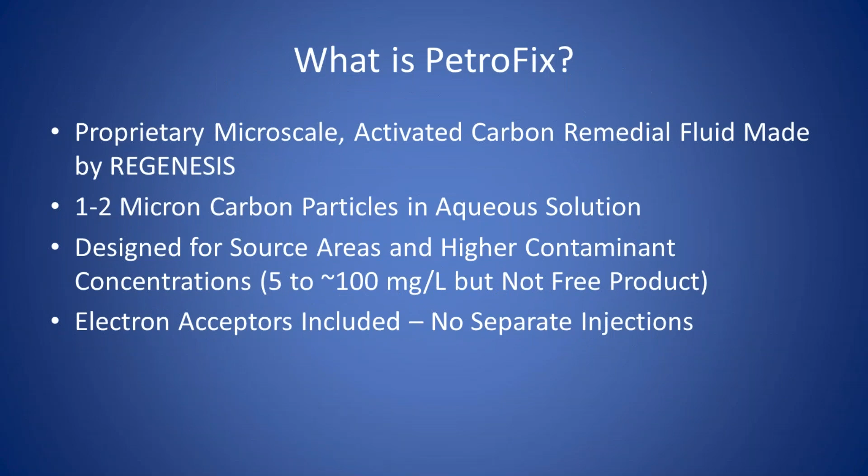It cannot do free product, but it really opens up a wide range of sites to remediation. And that's not to say that it won't do polishing steps too. It'll do basically 100 milligrams down, so a very wide range of applications. They have also included the electron acceptors to enhance biodegradation. As opposed to some other technologies, you don't have to do separate injections of oxygenates or electron acceptors, that kind of thing. And Chad's going to talk about that a little more in detail later.

Now, the pilot test site was the Reef Deli site in Panama City Beach, Florida. It was the first field use of PetroFix outside of the laboratory. It's an insurance site that we have, so it's a privately funded, performance-based cleanup site. There was approximately a 1,000-gallon discharge of gasoline in March of 2007.

Shortly after that, they did a source removal by excavation, and then a series of consultants and technologies worked on the site, and they've done groundwater treatment by pump and treat, by bioremediation, and by injection of hydrogen peroxide. None were ultimately successful. There were varying degrees of success, but there was still a fair amount of residual contamination out there. Of even more concern was there was off-site migration of toluene, ethylbenzene, and xylenes, naphthalenes, and total recoverable petroleum hydrocarbons.

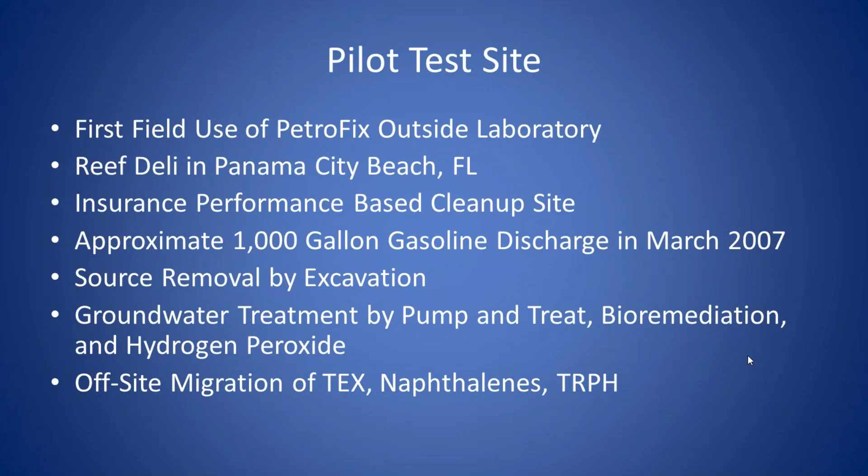The site layout: this is the Reef Deli site. It was a gas station, now a convenience store. You can see the dotted outline was where the tanks had been and what was excavated. And then the contamination went across Front Beach Road. This was a former hotel site that's been razed, and it actually went, there's a sea oats area here, and then all the way out onto Panama City Beach at one point in time.

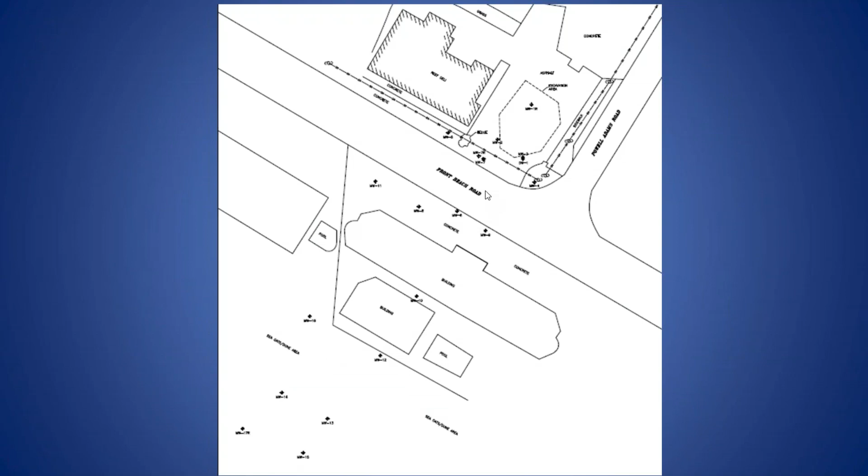There's a close-up of October 2017 concentrations of total xylenes. You can see in better detail the excavation area here. Note that excavation stopped because of this overhead power line. They couldn't get too close to that. Obviously, Front Beach Road is a pretty heavily traveled road, and they could not excavate or do anything out in the roadway itself. So residual contamination, as would be expected, on the south side of the excavation area, a lot of mass underneath Front Beach Road where we really couldn't access it.

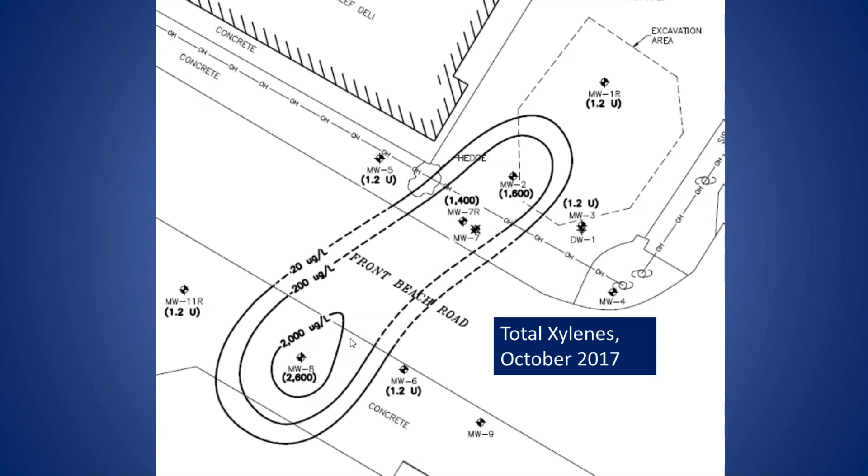And the highest concentrations in any monitor well were actually in this off-site well, monitor well 8. So lots of concern about how we were going to address this. And here's an aerial photograph view. The red showing the same concentration outline with the Reef Deli site up here, and this was the former hotel site with the sea oats area and the beach itself.

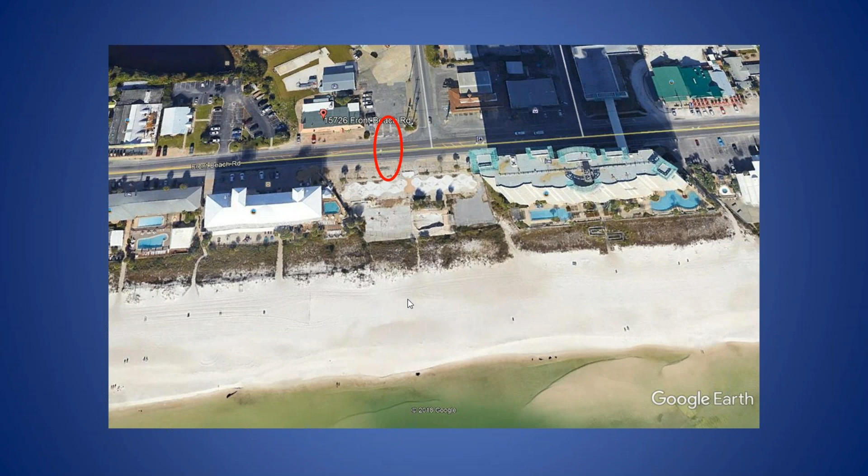So not awful working conditions. For some reason, I don't have any real problem in getting volunteers to come work on the site. And REGENESIS actually had some guys come from California out here for some reason. I don't know. But you've got to worry about the sun and the sand and that kind of stuff getting in all your equipment.

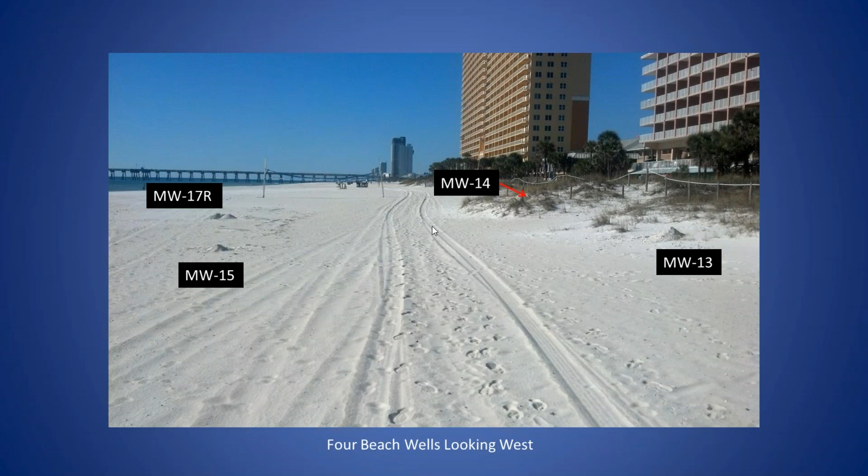Historically, concentrations have been up and down. I'm sure the guys that had the site in 2015 thought they were closing in on cleanup, but this is from 2013, so 6 years after the initial release. You had 40,000 total contaminants. It dropped down and then bounced back up and then bounced back down. But you can see when we were looking at it in 2017, it was still around 20 ppm, 20,000 micrograms per liter of total contaminants. Benzene was gone, which is good news, but toluene, ethylbenzene, xylenes, naphthalene, and total recoverable petroleum hydrocarbons were all of concern. The groundwater cleanup target levels that we're being held to are shown there also in micrograms per liter.

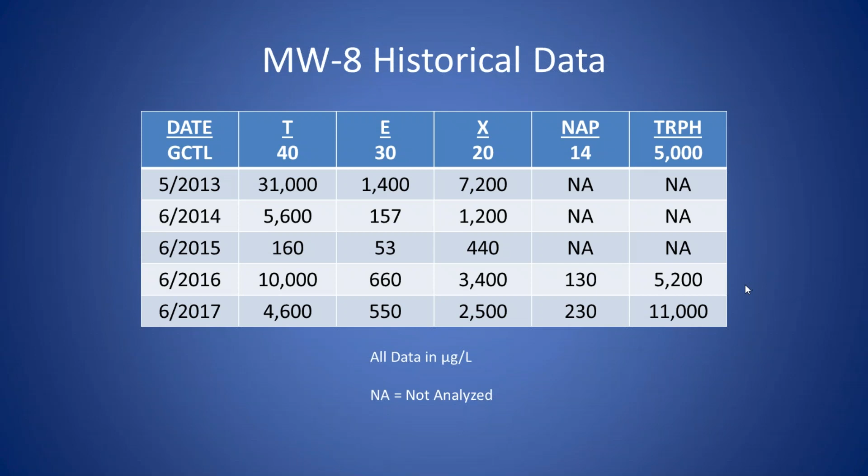Well, we put together a pilot test plan in consultation with REGENESIS. We focused on monitor well 8 as the off-site well, which obviously was a concern. We'd like to bring everything back to the site, and also the hottest well. The plan called for 1,700 pounds of PetroFix, including 40 pounds of electron acceptor salts, in an aqueous dilution. This, as I said, was the first field application. So they're taking it out of the lab into the field. And one of the things they were looking at is what dilution could be injected the most effectively. So they were playing with dilution rates.

They did a lot of pre-injection and post-injection borings to look at the lithology and the distribution of the PetroFix after it was injected. But the plan called for injection from 10 feet below land surface to 20 feet below land surface, with the groundwater table at about 10.5 to 11 feet, so just slightly above the water table to basically 10 feet below it, on 7-foot centers.

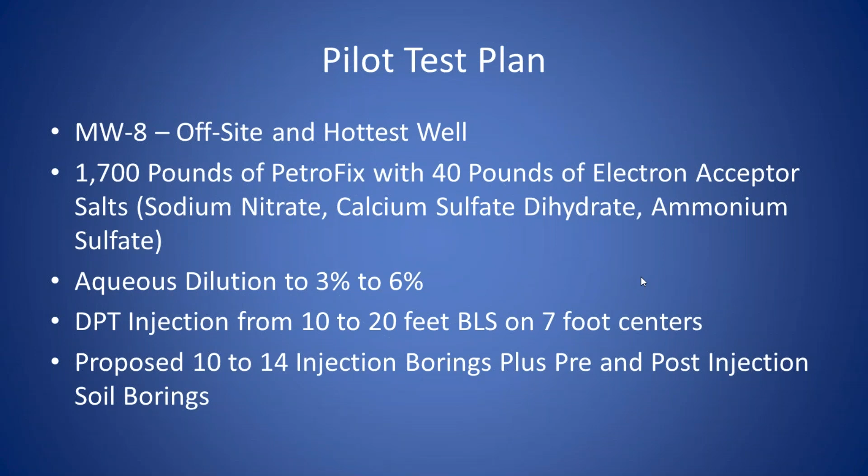We used, as I said, PlumeStop is sort of a sister technology to this. DEP requires an innovative technology acceptance letter, which is a letter that says, we've looked at the technology, we don't think it's going to cause any problems, and here are the underground injection control parameters you need to monitor for during the test. So we used that, worked with the district office over there in Pensacola, who were tremendously helpful, and got our plan approved.

As I said, the cleanup goals are the groundwater cleanup target levels in Chapter 62-777 of Florida Administrative Code. For those of you that aren't in Florida, that'll make perfect sense to those of us that are based in Florida. To those of you that aren't, as opposed to doing a risk assessment site-specific, what Florida did was come at it from the other direction and had a group of risk assessment and toxicological professionals come up with a

table of cleanup standards. The groundwater cleanup standards are basically the federal maximum contaminant levels, the MCLs, the primary drinking water standards, and then they set standards for a number of other compounds based on that level of health risk. And this went through a full rule development workshop, public noticing, acceptance, and all that. This wasn't just something thrown out there by DEP, but it gives you a tabularized list for several hundred compounds that you can simply look up the cleanup standards.

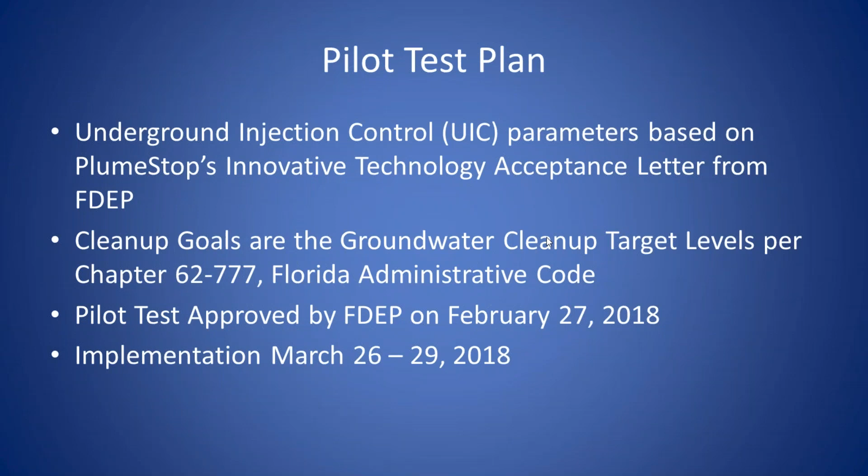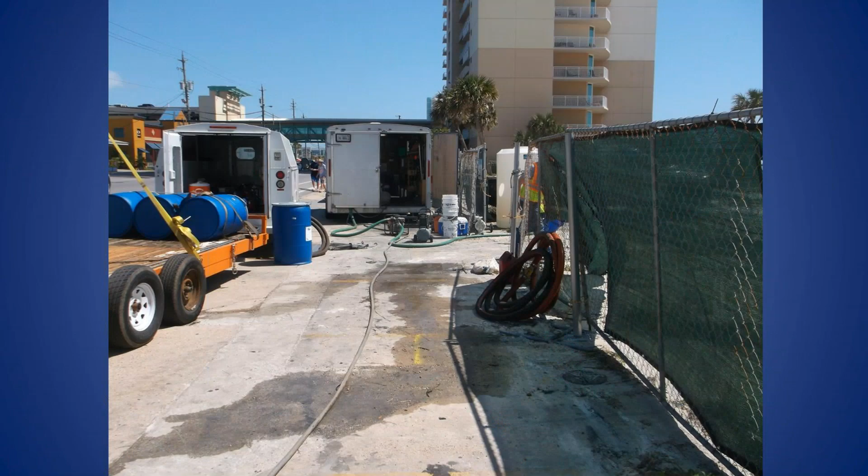The pilot test was approved by DEP at the end of February 2018, and we implemented it almost exactly a month later in March of 2018. As I said, we didn't have water on site, so we were ferrying water over to this poly tank here. And then we had the PetroFix on the back of the drilling truck there. This is REGENESIS's mixing trailer. So they've got mixing tanks in there.

We would take the PetroFix, they were bringing it in 5-gallon buckets. You can see that black. It's a very, very black, if you've ever seen granular activated carbon, same stuff that you use in aquarium filters and that kind of stuff. It's pitch black, and this is a pitch black liquid. They were putting it in there.

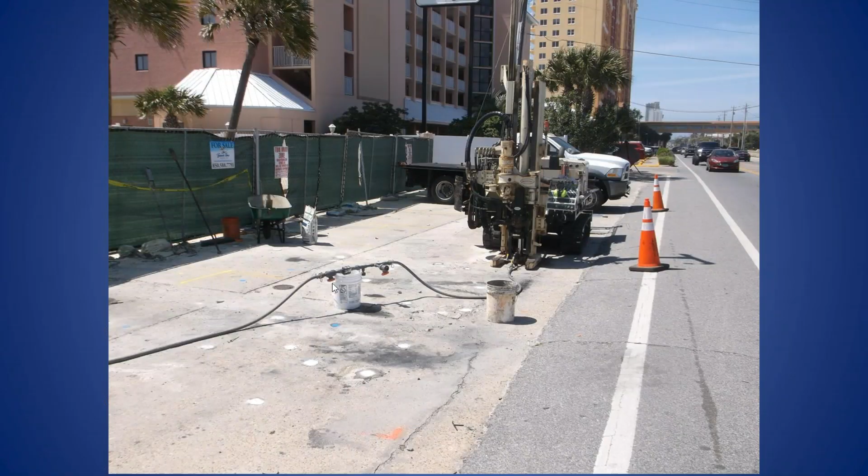They have a bunch of pumps and metering devices in there, and then it was coming out with this hose, going through some more meters and pressure gauges out here, and then getting injected through a direct push technology drill rig. That's monitor well 8 that we saw previously. You can see each one of these little white dots was a DPT injection point or boring.

That's not to say that every one of these we had PetroFix injected in. Like I said, a lot of what we were doing was going slow and taking pre-injection lithology borings, and then post-injection looking at how the PetroFix had distributed in the subsurface and comparing that to the various dilutions.

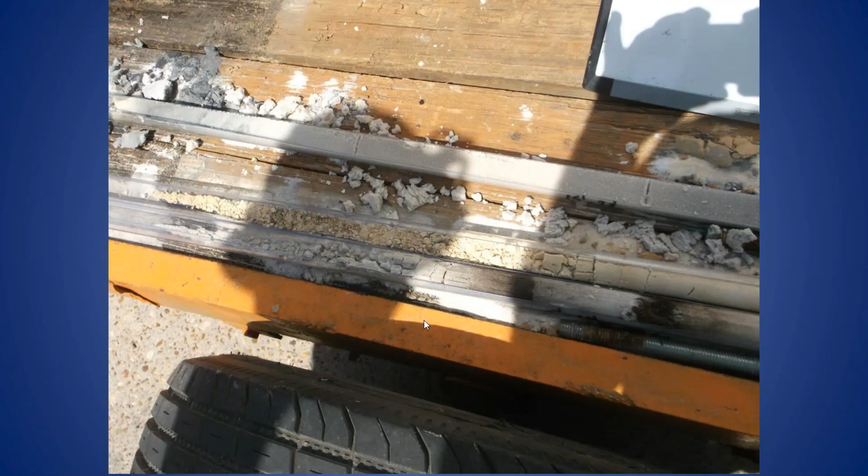Here's one of those cores. One of the reasons that REGENESIS was interested in this site was this is probably as close to a laboratory sand tank as you're going to find in nature. This is all beach sand. It's a very fine-grained sand. You can see, white, and then it gets into some staining from the petroleum. But that's what we were injecting in.

So injections were relatively low pressure. Generally, most of them were less than 30 psi, and we were getting pretty high flow rates. I think we got upwards of 10 gallons a minute in a couple of those holes. So, yeah, ideal injection scenario.

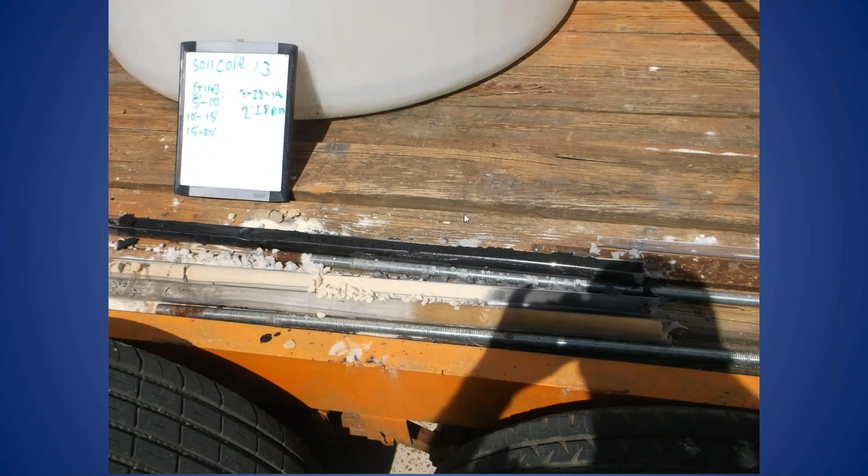And that's one of the nice things about PetroFix is you get a real visual indication of what's going on. There's no special equipment required to begin to see whether you got distribution or not. If it's pitch black, you got it out there.

Now, PetroFix works through a two-part mechanism. The first is obviously just direct adsorption onto the carbon, similar to any granular activated carbon vessel. Exactly same mechanism. Once it's in the environment and has plated out on the soil particles, it also provides a really ideal substrate for biological degradation. And as the degradation continues, the bacteria eat the contaminants, they basically free up a sorption site. And then another molecule of contaminant can get attached to the carbon, and then the bugs can eat that. And it's a repetitive, almost in situ renewal type process.

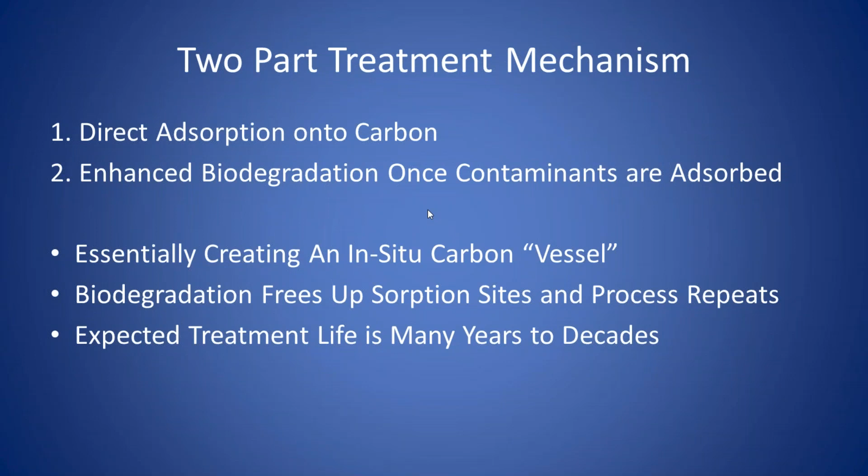So did it work? I think the answer is pretty conclusively yes. You saw some of this data earlier. This is 2016 and 2017. You're in the thousands here. We injected in March, the end of March. So May was the 60-day post-injection test. The U means it's undetected at that particular method detection limit. Everything's undetected at 90 days or 1/4 post-injection, undetected. 180 days, undetected. We've got a couple of little blips that showed up actually below the reporting limit, but in essence, for a solid year since we've done the injection, everything is BDL. Not just below the cleanup target levels, but below laboratory detection limits.

I've not seen anything like that in 37 years. And I was around for when air sparging and soil vapor extraction were the newest, greatest things. I think it's in line with that as far as a disruptive technology. Now, obviously, it needs to get proved in the field, and we're working on that. But that's just incredible. Really happy with those results.

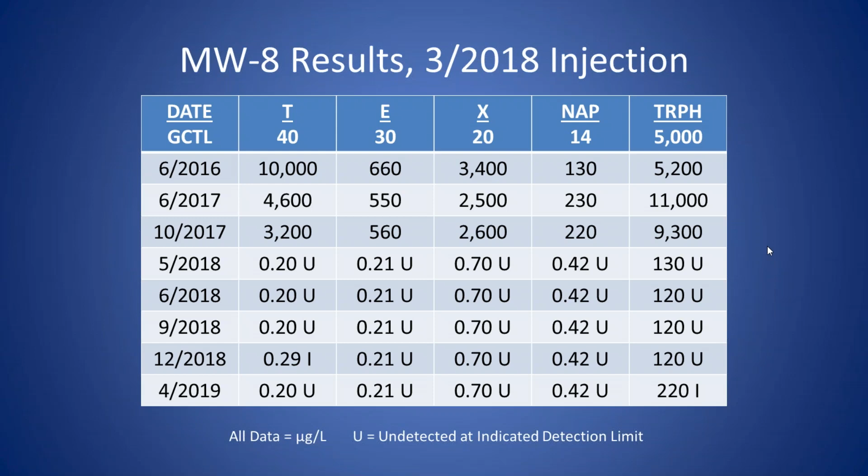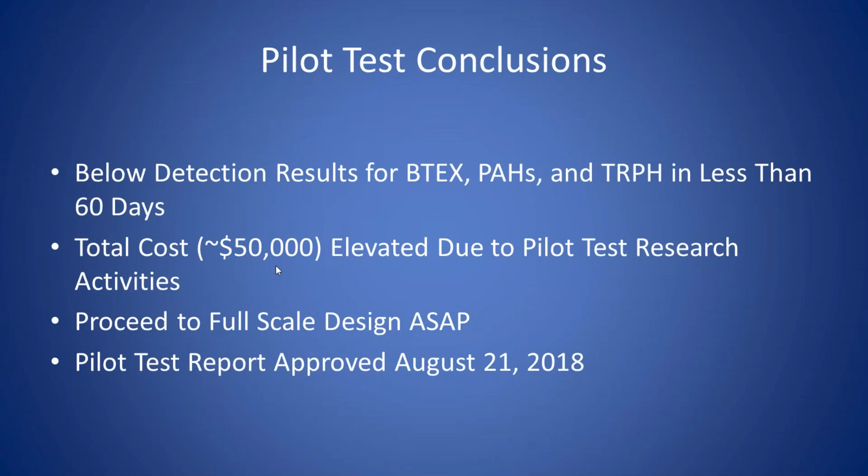So our conclusions were, we got below detection in 60 days. It stayed there for a year. We didn't know that at the time, but it has. The total cost for that pilot test was about $50,000. Now that was elevated, as I said, due to the multiple borings we did and the extra days we spent on site. But even that is not an enormous amount of money compared to what we normally spend on remediation. The obvious conclusion was, let's get the full-scale design as soon as we can, and DEP agreed and approved the pilot test in August of 2018. So we proceeded to the full-scale design, submitted the remedial action plan in early October 2018.

Now, as an engineer, one of the really interesting and attractive things to me, in addition to the performance, is the fact that there's a self-design internet application, petrofix.com. You go in, you enter in your site characteristics. It gives you a recommended spacing and dosage along with pricing. So you can do that all online at your desk. Now, obviously, Todd and the REGENESIS team are available to help you if you've got questions or just want to go over it with them. But compared to every other technology out there where it's all proprietary and you're relying on somebody else to do it, that's a huge benefit to me.

The area that's left on the Reef Deli site itself, so north of Front Beach Road, is about 1,600 square feet and is 2 wells, Monitor Well 2 and Monitor Well 7R. Water table there is around 13 feet, so our zone of influence that we wanted vertically was 13 to 23 feet. The application called for 2,800 pounds of PetroFix in almost 12,000 gallons of water and 44 injection points, which was a 6-foot grid pattern. Estimated cost for PetroFix and DPT injections was $35,000.

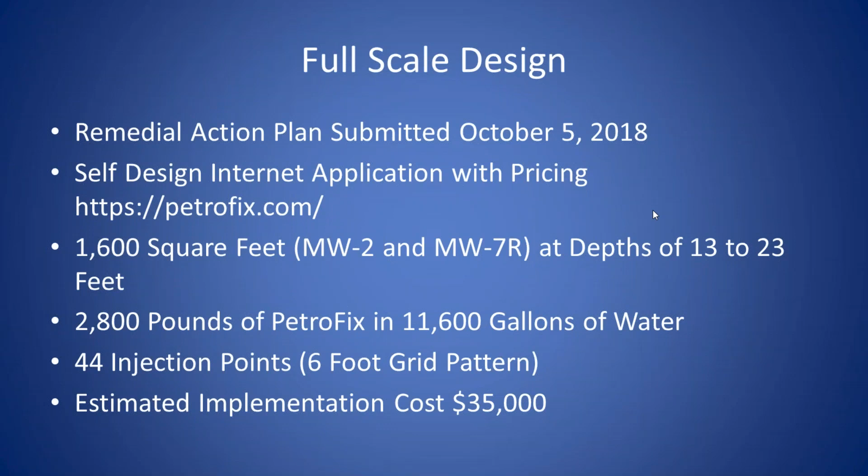Now, this was the plume in June of 2018, which is what we were using to base the design on. Monitor Well 8 had cleaned up. So we were left with the outer ring, which is the groundwater cleanup target levels, or the MCLs in primary drinking water contour. The inner is the natural attenuation default concentrations. And those are your 2 wells, Monitor Well 2 and Monitor Well 7R. We had good up gradient control with the clean well, good side gradient control with the clean well, and Monitor Well 3 had been clean for some years at the time it was abandoned. So we're pretty confident that the groundwater plume is on the southern side of this site and obviously extends underneath Front Beach Road. But because of the pilot test work we did around Monitor Well 8, not only is Monitor Well 8 clean, but essentially we've got a permeable reactive barrier here addressing that mass that is coming out under Front Beach Road.

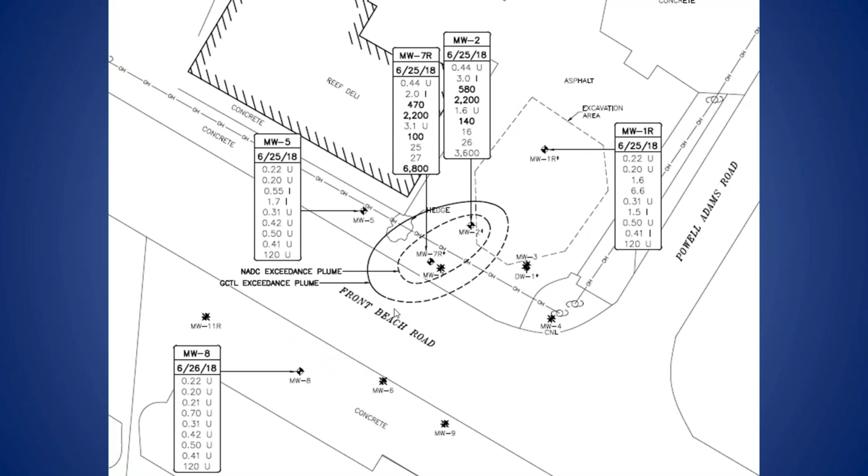And there was the grid pattern. We just tweaked it a little bit to work around some of the site features, and obviously we're going to push it as close to the road as DOT will allow us, but we're not allowed into the road.

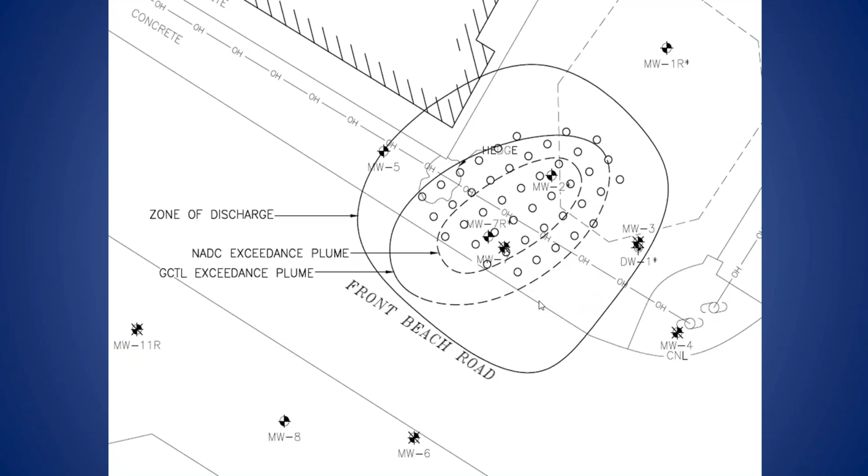So, are we going to talk about the full-scale successful implementation of this? Well, in the immortal words of Lee Corso, not so fast, my friend. Not so fast. We had a couple of hiccups in terms of some regulatory hoops we had to jump through. Just like the pilot test, we were going in under PlumeStop's Innovative Technology Acceptance Letter, because again, they're sister technologies, and I reasoned that if it'll work for PlumeStop, it ought to work for PetroFix. DEP disagreed with that interpretation.

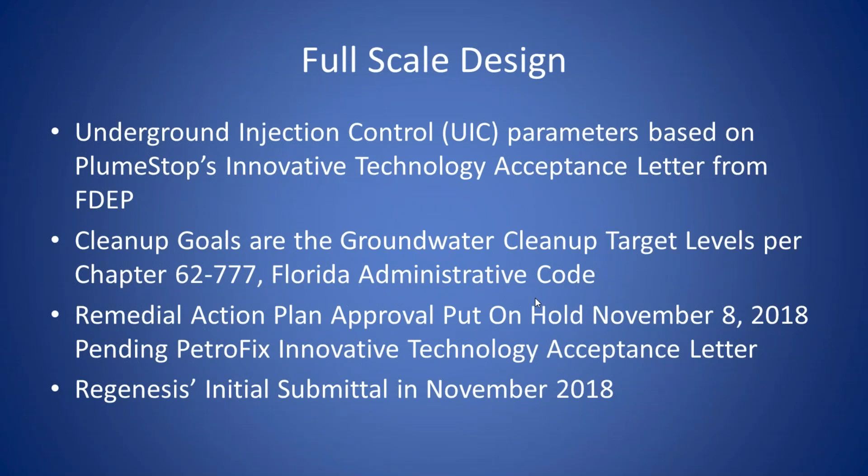They reviewed the initial submittal, came back in early November and said, hey, looks great, but you have to have an Innovative Technology Acceptance Letter specifically for PetroFix before we'll approve this. It got really complicated because the guy that had done it for the previous 10 years or so had retired that summer. So REGENESIS had verbal contact with the new person starting in early fall. They did their initial submittal in November of 2018. Lots of back and forth and discussions. And we got to an approval in May, which we thought was really good results.

Now, because the UIC parameters changed slightly, we had to do an addendum to the original full-scale design that we had submitted. We got that in a couple of weeks after getting that acceptance letter. And they came back about a month later and said, hey, great, you're all approved, except because the zone of discharge extends off-site, rules require that you notify all the off-site property owners via certified letter and public comment period. So that's been done. We expect everything to be wrapped up and approved by the end of this month.

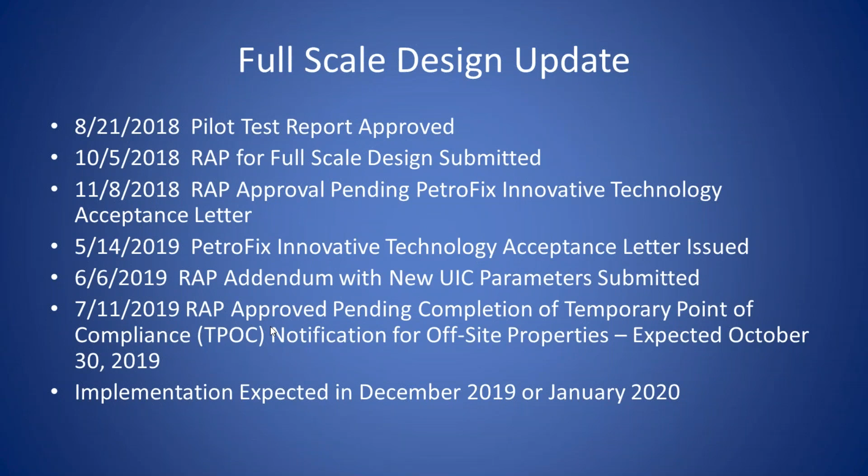And that will then allow us, once I can get the driller schedule, to actually go to full scale in December or possibly January. So we're there. I'm a little frustrated that we haven't gotten this site already done and closed out, but so far so good. The results are tremendous. So that wraps up. I think we're going to hold all questions till the end.

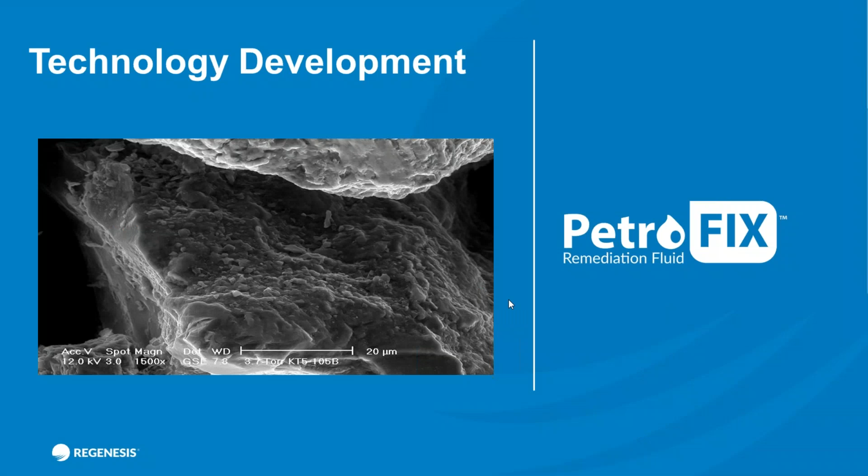So I want to take a look at how we developed this technology and where it started. As Gordon alluded to, this stemmed from the development of PlumeStop, which launched in 2013 after many years of R&D work. It's been applied at over 500 sites worldwide, and has been recognized as a leading in situ technology for the treatment of chlorinated solvents, hydrocarbons, and now passive plume management and treatment of per- and polyfluoroalkyl substances, or PFAS. You can see that natural evolution. We wanted to improve upon that.

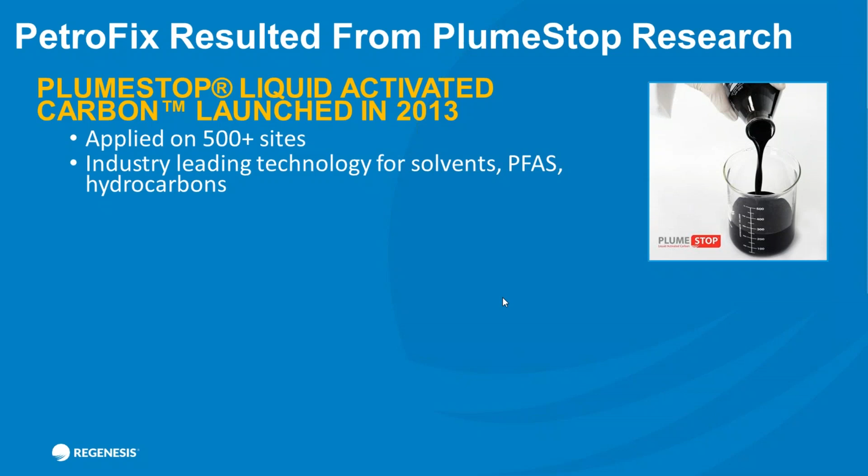And we looked at PlumeStop and said, well, how can we make this better for petroleum hydrocarbon cleanup? And essentially, there were several areas that we focused on. First of all, we wanted to look at higher mass sites. With PlumeStop, there were some limitations in terms of mass concentrations that we could handle. And so we wanted to improve in that area.

Gordon and I have worked on a previous site where we actually did a mass reduction step first and did that with chemical oxidation so that we could transition to PlumeStop. In the case of PetroFix, we can often eliminate that first step, that extra phase, so to speak, and move directly into PetroFix remediation.

So the other thing is we often would co-inject an electron acceptor with PlumeStop. In the case of PetroFix, it's already built in. We can mix it above ground. Part of it's built into the formulation. I'll show that to you later. And we can move right into injecting all that as a single material rather than co-injecting electron acceptors.

And also, as Gordon alluded to, we have turned this into a take control sort of process. So as an engineer, Gordon alluded to the fact that he likes to be able to have the design in hand, be able to work through the numbers, but not just the design, but also the application of this material. So from start to finish, the user's able to move through the design and application process.

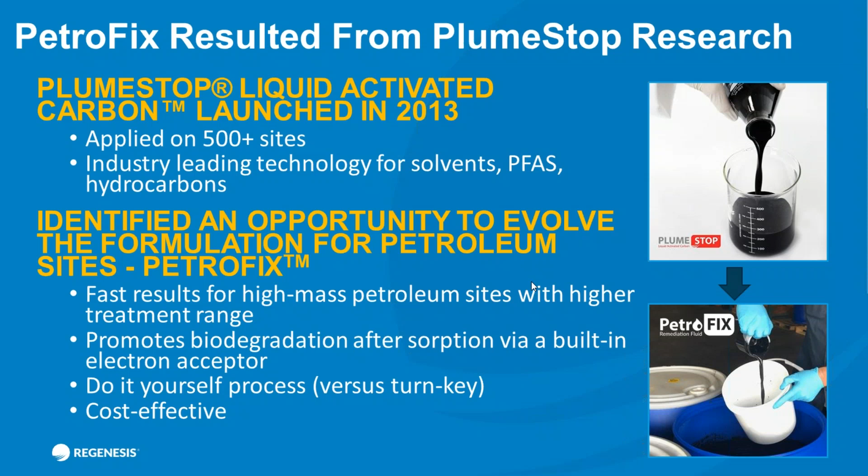So I want to take a look at activated carbon just in general and kind of compare that to colloidal carbon. So we're all familiar with granular activated carbon, or GAC. That's on the scale of about 400 to 1,000 microns. That might sound small, but it's really not, and I'll show you why. And of course, if you're going to apply this in the subsurface, you would need tremendous pressure. You're going to cause fracturing or fracking of the subsurface.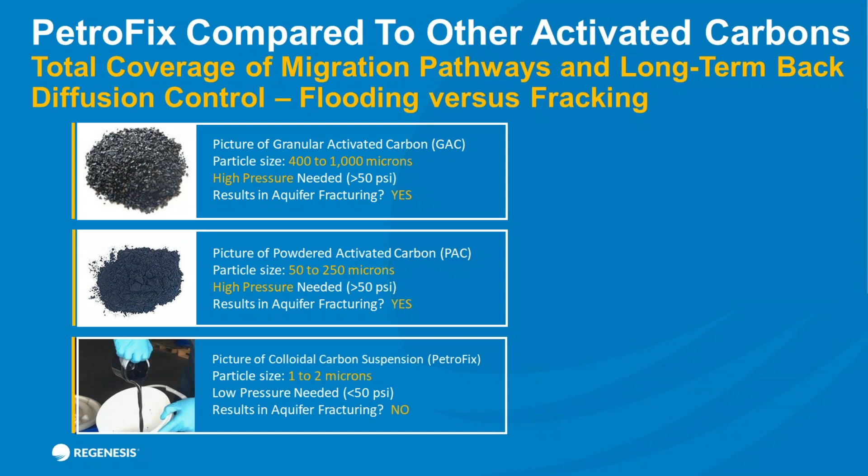And it's a similar situation even if you go to a powdered activated carbon. Although it's 50 to 250 microns, you're still going to need high pressure. You're going to get kind of a random distribution of that material and cause fracturing in the subsurface. However, with colloidal carbon, it's 1 to 2 microns. And so what you're able to do is actually move that material through the pore throat diameters of a typical geology and not result in this fracking.

We can inject at pressures generally less than 50 psi. On the Reef Deli site, we're able to inject at about 30 or so or less. And then that's obviously not going to result in a fracking scenario. We actually prefer flooding to fracking is one way to think about it.

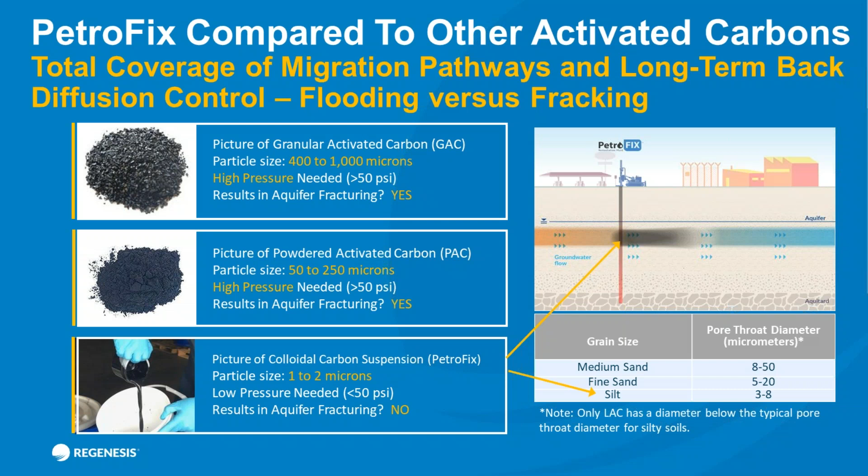So we're trying to distribute this material across what we would call the flux transport zone. So this is where the contaminant is moving. It dictates the architecture and the plume behavior. And so that's what we're trying to get to, that target treatment zone, and try to distribute across that entire zone rather than fracking this material under high pressure.

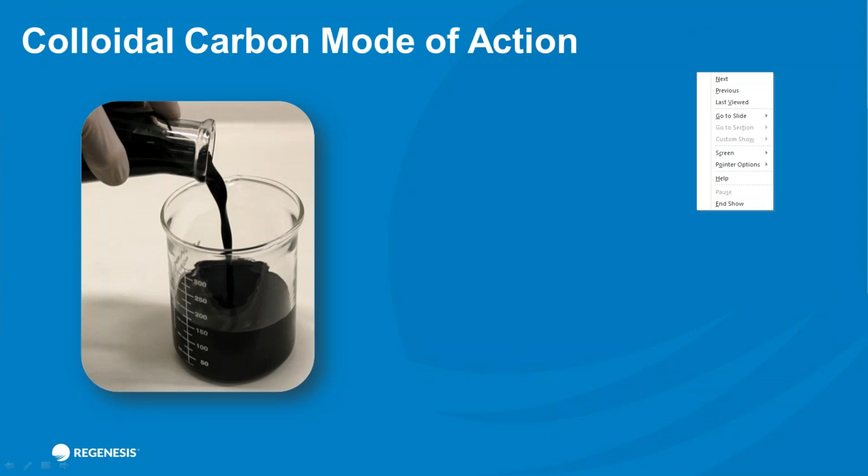So in terms of the modes of action, I'm going to give you a visual here. So Gordon had alluded to this. I want to do it visually. So the first step here is you can see that there's injection of material. It's going to create kind of a light coating. It's going to become a part of the aquifer matrix. I like to say it actually paints the remedial landscape.

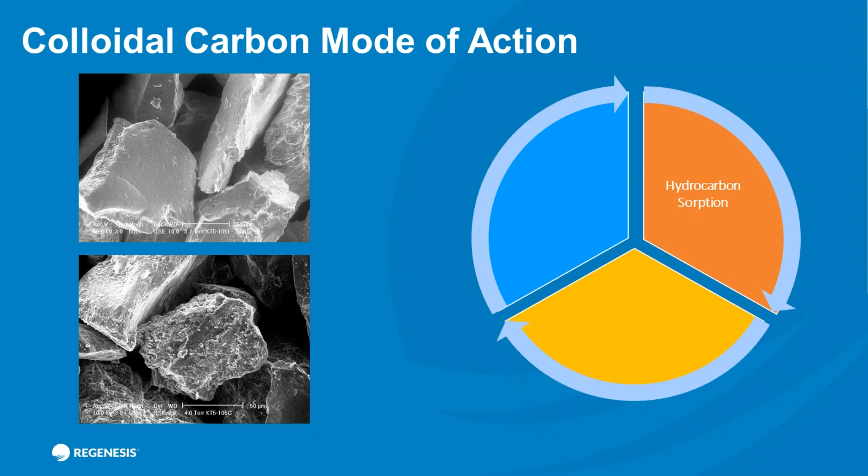So we're converting the subsurface into a carbon filter essentially. And we're not blocking the pore throats. We're not changing the hydraulics of the system. We're creating a carbon filter in situ. And then after that happens, you can see that the microbial community now moves in. They start to build some of their microbial condos, and they're going to occupy essentially this large surface area that's provided by the activated carbon.

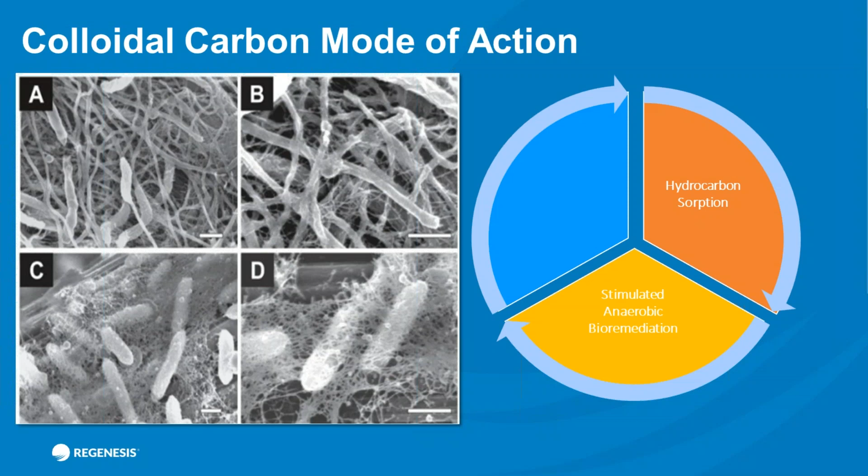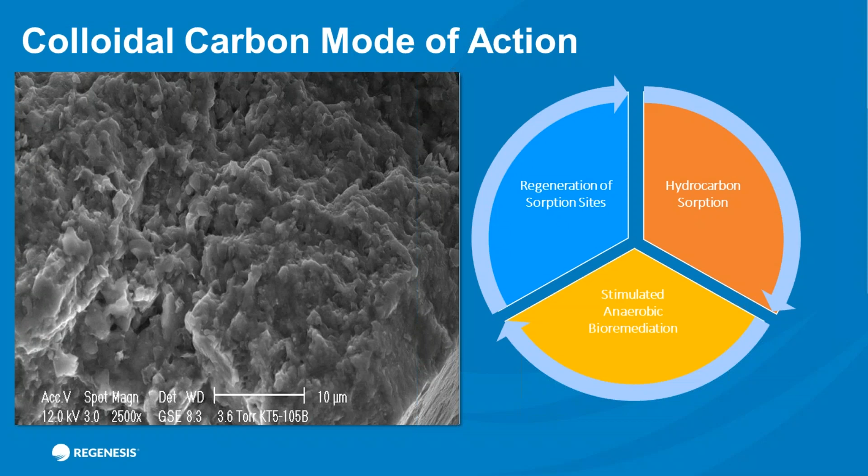And once that starts happening, you'll see that they start to degrade and munch on these molecules and essentially free up new sorption sites by naturally in situ regenerating that carbon surface. So as long as these microbes are receiving what they need, they reach a state of what I would call biological or biogeochemical bliss is what I like to refer to it as.

So that's the general process. That's going to apply both to PetroFix or PlumeStop. It's colloidal in nature, and they both behave in the subsurface that way. But let's look at a couple of the differences between these two colloidal carbons. So first of all, one major aspect or difference is the amount of carbon in the reagent itself.

So PlumeStop is around 4% or more as shipped, whereas PetroFix is going to be in the 7 to 8 times more carbon content range, over 30% generally. So you're getting a lot more carbon and a lot more sorption capacity built into that. So that's one of the reasons that we're able to use it for higher mass sites.

Now, PlumeStop has a very unique dispersion chemistry. It has a natural organic polymer built into it. It's what allows it to distribute, but not indefinitely. And then that polymer essentially degrades and it bonds to the aquifer matrix.

PetroFix doesn't have that same chemistry. And you can think of it as kind of the price to pay a little bit for adding in the extra carbon. So you're going to have to do a little tighter spacing, generally maybe in the 5 to 6.5 foot range on center. So that's another difference between the two reagents.

PlumeStop generally is used as a platform, and then we're co-injecting different reagents with it to determine how we want to handle the particular contaminants of concern. Whereas PetroFix was really formulated specifically to deal with petroleum hydrocarbons with that built-in electron acceptor.

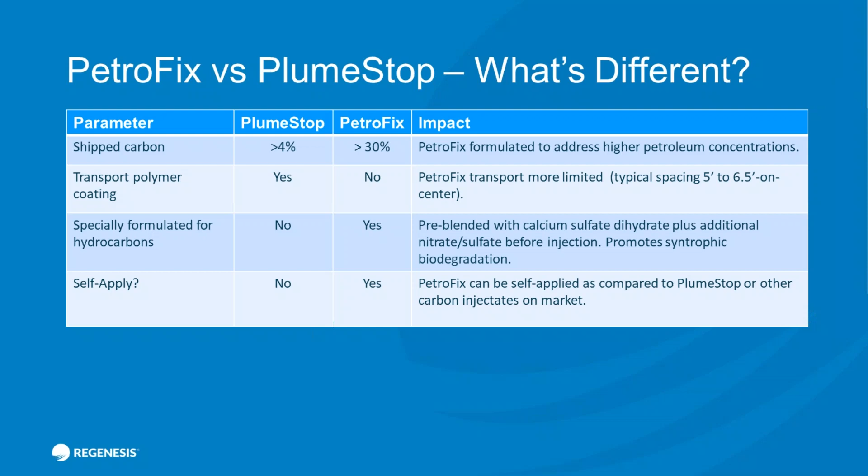So let me dig in a little bit more on the PetroFix technology and some of the key features. So again, this is a micron scale activated carbon, and sometimes I have a hard time putting my head around what 1 to 2 microns means. Well, think of it as the size of a red blood cell or the size of a bacterium. So we're talking really, really small stuff here. It's hard to think of it as a particle in that sense.

And then we're using an anaerobic pathway via nitrate and sulfate electron acceptors, another thing I'll talk about in a little more detail here. And of course, it treats a very broad spectrum of petroleum hydrocarbons. Of course, your BTEX suite; you saw some of the numbers with the TPH on this particular site we're talking about today.

And we can use just standard equipment to apply this material at low pressures and high volume and very wide area distribution, with standard tooling, standard injection materials, whether we do that with direct push or injection wells. And also, as Gordon mentioned, generally up to free phase is kind of fair game for PetroFix.

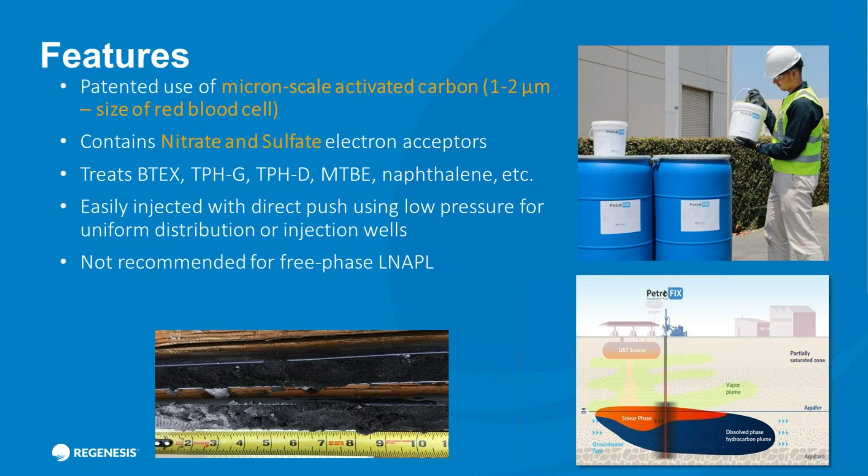So let's look at this a little closer. So we know we've got micron scale carbon. We're shipping this at generally above 30% carbon. And again, it actually has sulfate built in, in the form of calcium sulfate dihydrate. That's actually built into the material as it's coming. And then you get this drum along with a bucket of electron acceptor.

With this electron acceptor, you have two choices. You can do the 20-pound blend of sulfate plus nitrate, or you can do a sulfate only or nitrate-free version. Generally we recommend the sulfate and nitrate version, the combined. It's going to be more efficient.

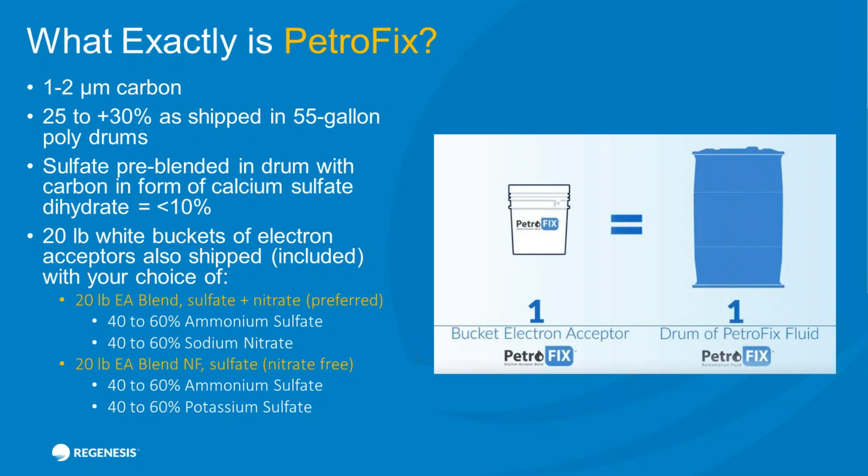But if there's any sort of concern on the part of a regulatory body, for example, there is the option to not have the nitrate. I have not seen that as a problem. Generally, everyone has accepted the sulfate nitrate blend, which is, again, preferred in this case.

So I'm not going to dig too deep into this, and this may be a new term for some folks, but what we're doing through this sulfate nitrate pathway, this anaerobic pathway, is promoting a process called syntrophic bioremediation. And essentially, syntrophic bioremediation refers to a community of microbes eating together and simultaneously using the same carbon source and the byproducts in that process. And what it does is it contributes a synergy and an efficiency to the degradation of these petroleum hydrocarbons.

For me, kind of the best analogy with Thanksgiving coming up: our side of the family, we love to do the turkey, the hams, the mashed potatoes, kind of the traditional stuff. And then my wife's side of the family, we have a Lebanese component. So we get to do mesha, some grape leaf stuff, some tabbouleh salad, and all of that. What it results in is more efficient eating. So the more we can bring to the table, the better off we're all going to be. And I think it's a similar analogy on a much different level here with the syntrophic bioremediation.

But what's interesting is once those electron acceptors are potentially depleted, the byproducts, essentially the hydrogen, the acetate, can be used by methanogenic communities to continue that process. So this keeps going maybe after these other electron acceptors are already used.

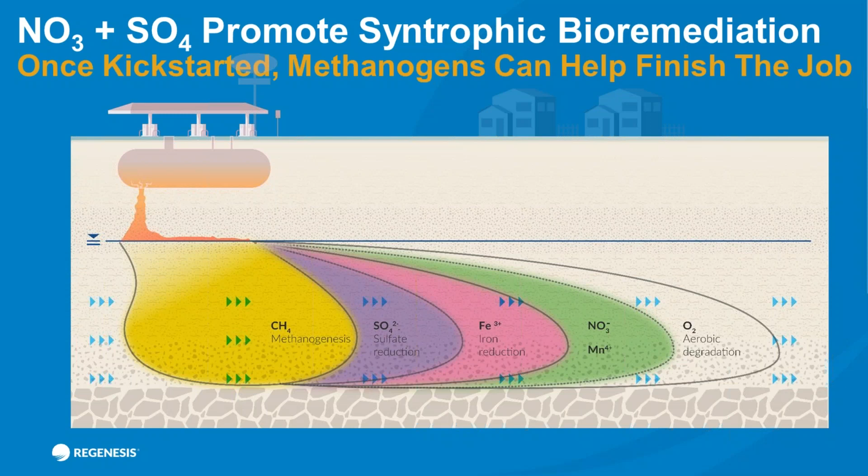So if you guys want to dig into this a little bit deeper, we have a great technical bulletin on the petrofix.com website, and it goes into a lot more detail on that process.

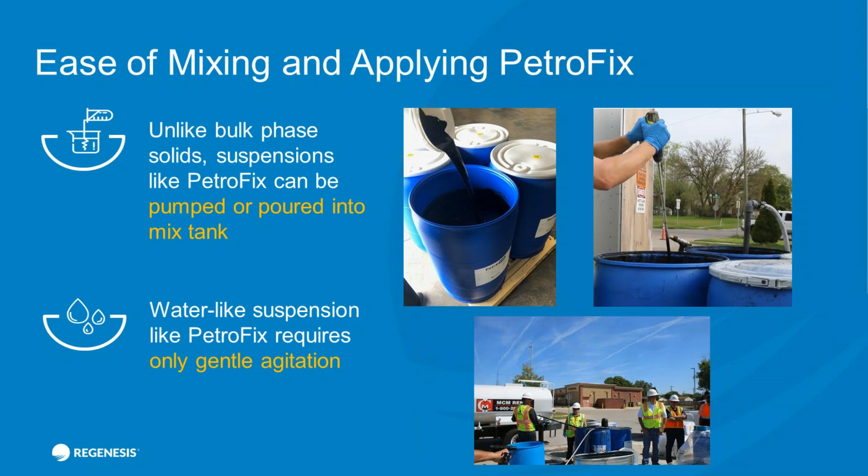So let's look at some of the different applications. You already got a taste of that with Gordon's presentation. You know, just generally in terms of how this material is applied, it's very easy to work with. You can see it can be very simply pumped or poured into the larger mix tanks, and it takes very little agitation to get this mixed into a larger batch volume. So just a little gentle agitation, and this stuff almost magically goes into a larger solution. So very simple to work with.

And again, here's some examples of that nice tracer characteristic of PetroFix. So you can see not just in the soil cores, that's very obvious there in the pictures to the right, before and after injection, but even in the monitoring wells. You will see influence when you're injecting around a monitoring well. You can see that show up in the well, and that's a great thing. That says we've got that material to move through that flux transport zone to come into the monitoring well,

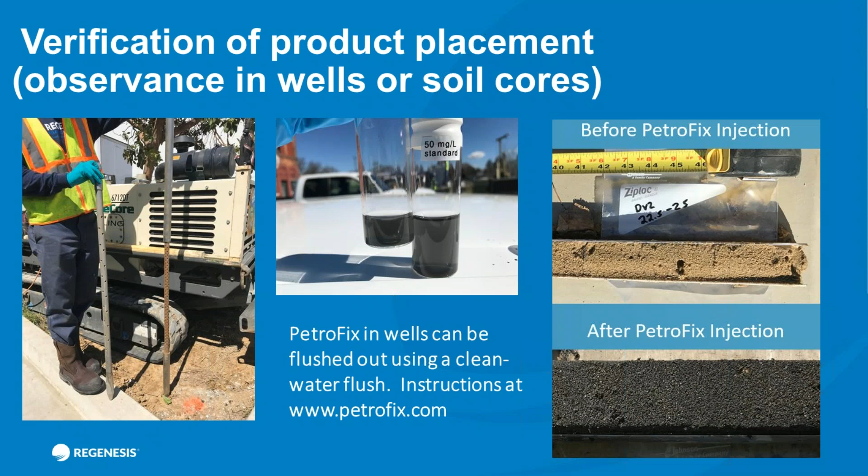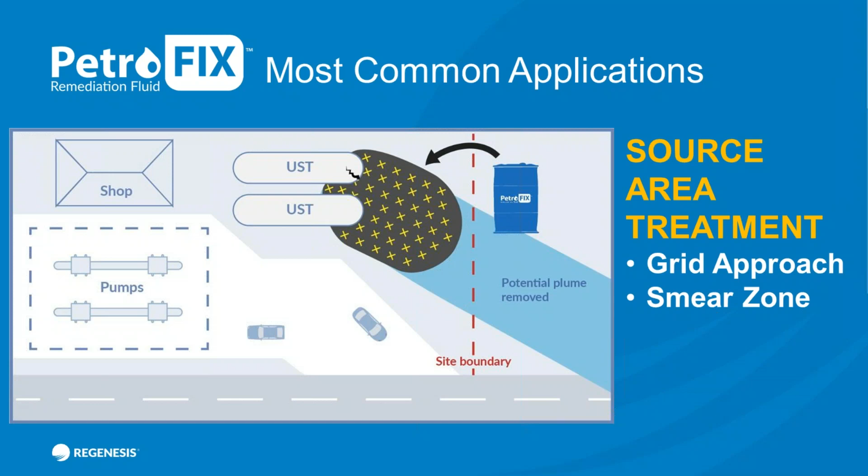and we can see that. If you want to remove that quickly, there is a flushing procedure that you'll see instructions for on the website. However, that material will subside in a relatively short period of time and bond to the aquifer matrix. So here's kind of the version where we're going right now with the full scale at this site with the grid treatment and addressing both the smear zone and the saturated zone. That's a very common application.

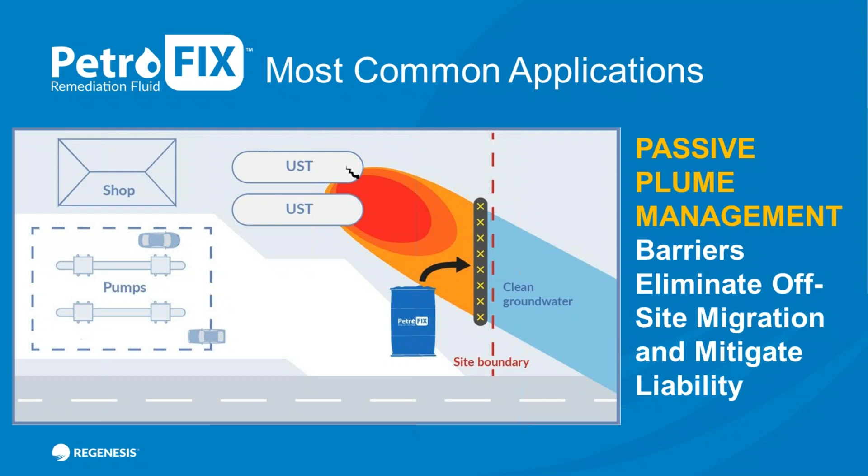And then we've already kind of done this at MW8, where we have a permeable reactive barrier of sorts, and not just stopping and adsorbing that material, but it's being degraded in place at that barrier. So you have this clean water front coming out the other side of the barrier, essentially. And then there's a third scenario.

Historically, folks have used our ORC Advanced pellets in excavation scenarios, and that's a great means of promoting aerobic bioremediation. But now with PetroFix, we're able to actually do kind of a one-two punch. So we also are adding in electron acceptors with it, so you still get that component of the bio, but we're also adding a long-term sorption component that's going to continue to work long after maybe the electron acceptors that we've initially added have depleted.

So this is going to be just simply spray applied into the excavation, and it can even be used to prevent, so to speak, continued future pollution if there were maybe a spill that occurred in that zone. So this is a very effective way when you have the pit open to provide both a long-term and a short-term means of dealing with that residual mass. I would also add that you could add ORC Advanced pellets with this to provide a very robust electron acceptor chain going right through that redox potential chain, and add that as well into this mix.

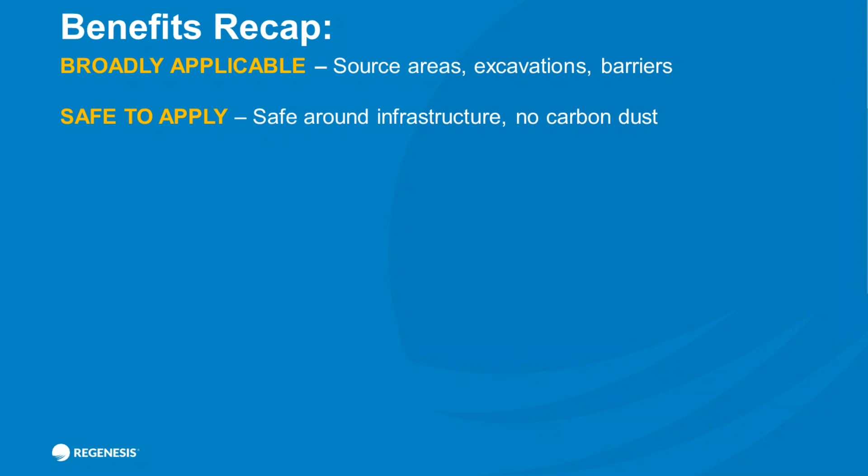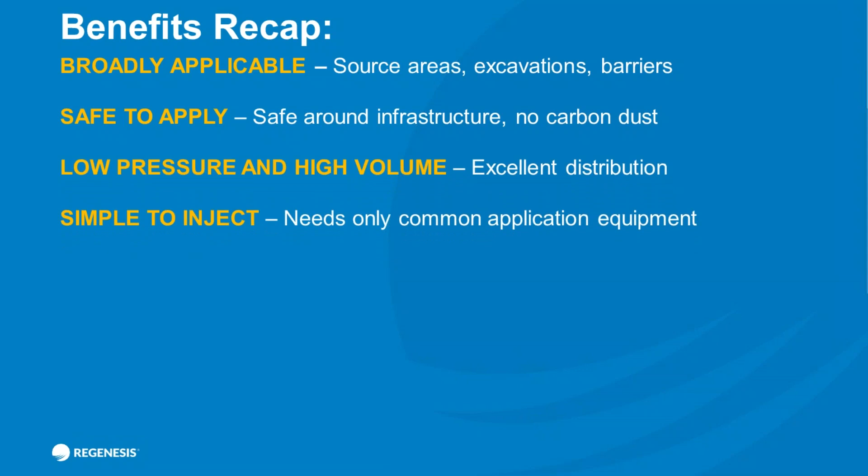And again, this is colloidal carbon, so you're not dealing with things for larger particle carbon like carbon dust that might happen. And then we're adding this at very low pressures, high volumes with standard equipment, and getting very good distribution in that flux transport zone. You only need common equipment to apply this, either through direct push or injection wells. And you're going to find this tracer quality makes it very easy to make sure you're getting this material where it needs to be. And all these online resources are available to everyone.

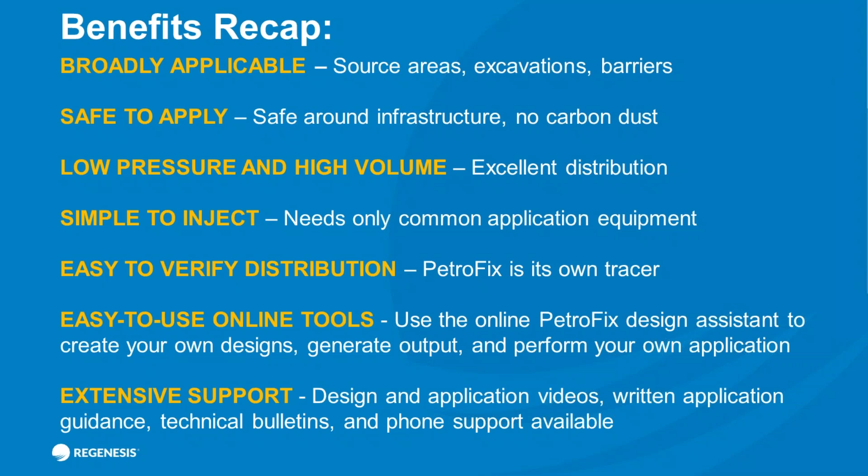All right, thank you very much, Chad. That does conclude the formal section of our presentation. So at this point, we would like to shift into the question and answer portion of the webcast.